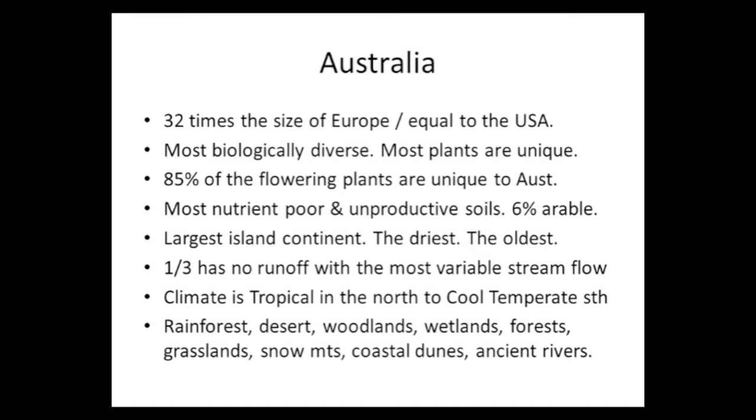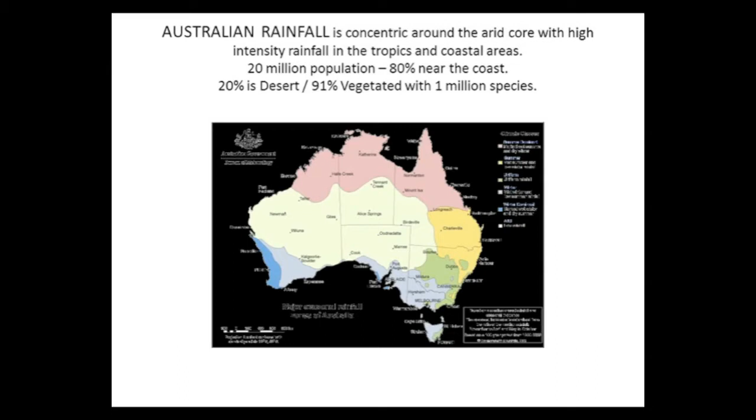As you can see from this map, our rainfall is concentric around an arid core with high intensity rainfall in the tropics to the north and the coastal areas, mainly on the east coast. 20% of the area is desert, which is that white patch, and 91% of the country is vegetated, mainly with hummock grasses and 1 million species, a lot of which have not been identified as yet. There's something like 75,000 flowering plants that aren't found anywhere else in the world.

The interesting thing about Australian plants, trees, is that the germination process for the seeds requires the chemicals from the bushfire smoke, which stays in the atmosphere and then mixed with water becomes part of the germination process.

This landscape will bounce back in about 3 months, and it's always interesting to go through the bush after a bushfire and to see how quickly the seeds start to germinate.

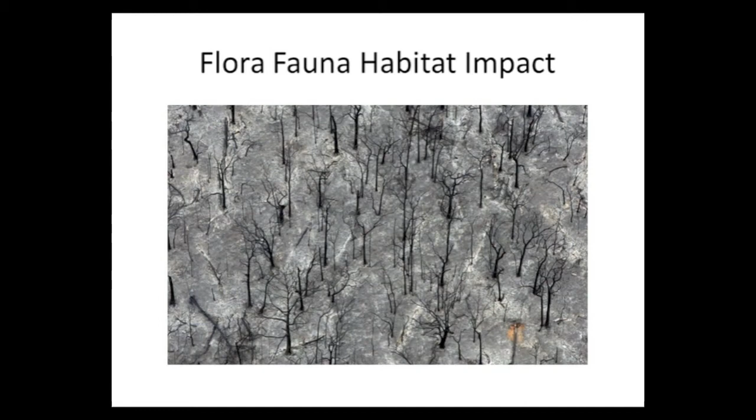In the far north, we've experienced a greater incidence of cyclone activity, which is wiping out the main agricultural belt supplier for Australia, sending food prices up. We envisage that over the next 100 years, Australia will be dependent on its food imports, as we see climate change and the agricultural belt having to move further south where the land is far more expensive and there's far more urbanization.

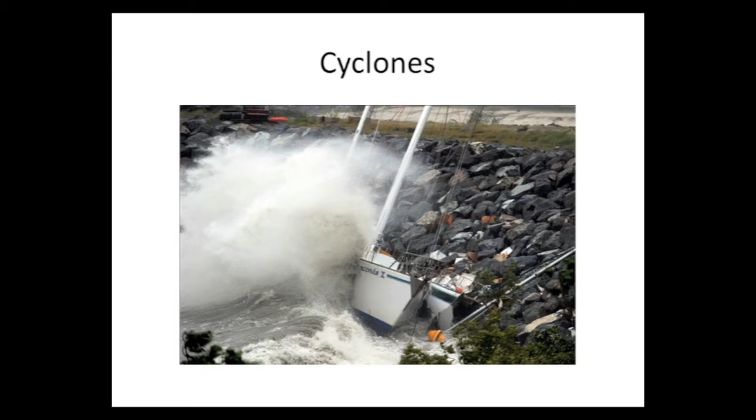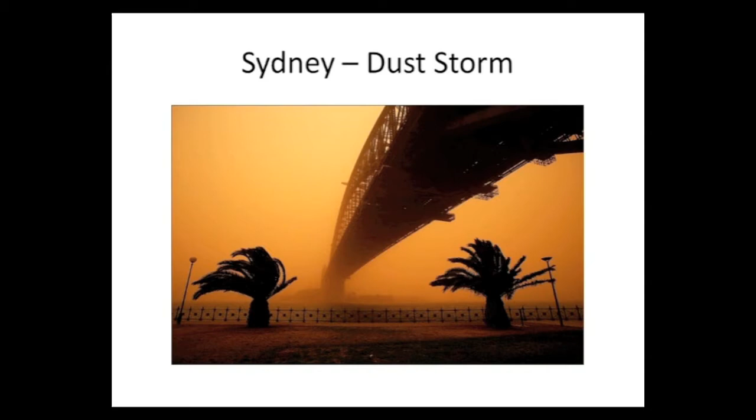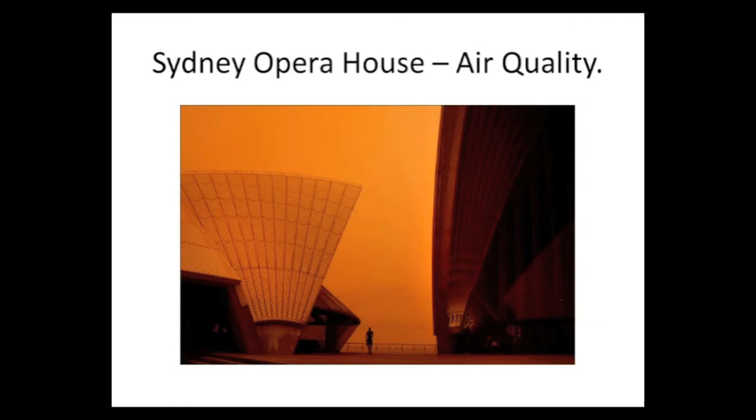Other strange phenomena have been caused by the 100-year drought. Red dust from the interior of the country has been blown and deposited in Sydney, 1,000 kilometres to the east on the coast. It's not like this all the time, but we're starting to see occurrences like this, which we're not used to.

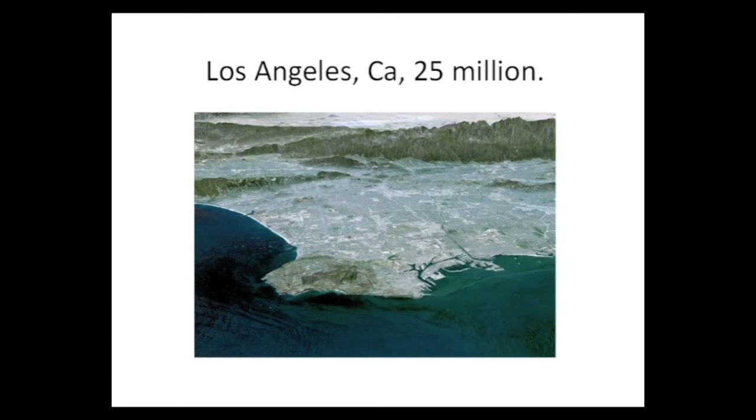Recently I flew over Los Angeles on my way to Mexico, and it was a bit of a crystal ball into how some Australian cities could be in another 25 years. We tend to have urban sprawl in Australia, with 85% of the population living in the capital cities, on the coast, or within 50 kilometres of the coast.

All of the stormwater runoff coming off the hard surfaces of cities is starting to impact on the quality of the waterways and the oceans around the cities.

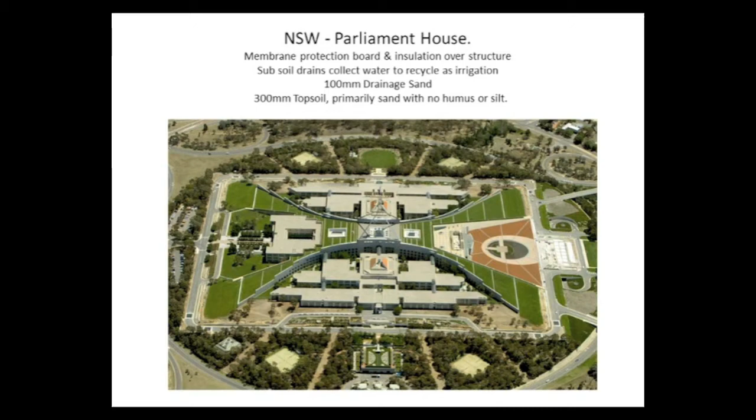It's interesting that recently they're trying to save 40% on the water cost for this green roof, so we've actually specified native grasses rather than Kentucky rye. Initially, the vision was that you could walk over the roof, but for security reasons, nobody's allowed on it anymore - not even kangaroos. There used to be herds of kangaroos walking across this roof, but that's all changed.

I'll just go through some of the cities, starting off with Sydney. City of Sydney are very proactive - they've got a 2030 vision for Sydney.

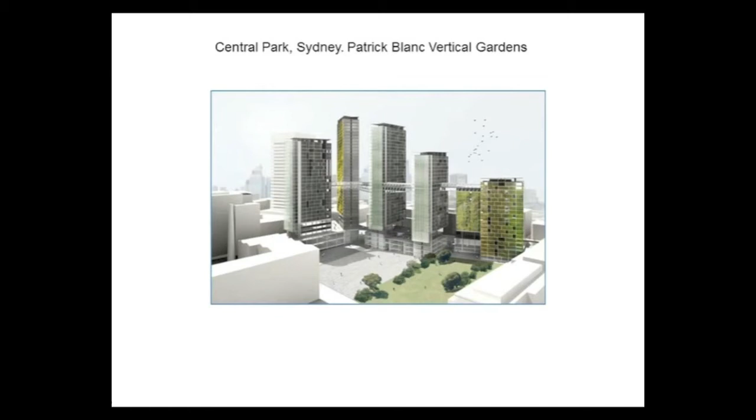This is one development in the CBD, apartment towers with Patrick Blanc coming over from Paris to design and install green walls on the facade. By the tallest wall, I mean a 33-metre high north-facing vegetated mat wall using irrigation and nutrient system with no soil.

There's 4,528 native Australian plants from 69 species, fed by a grey water dripper irrigation system running across at 3-metre intervals, and the irrigation system is automatically activated six times a day and can be remotely controlled.

There's also a 36,000 litre water tank enabling water to be cycled to reduce overall consumption. The plants were chosen for their hardiness, and some of them thrive in high exposure sun, such as the acacia and the poa, placed higher up on the wall.

This is a retrofit green roof amenity space quite close to the Trio Apartments in Camperdown. Quite simple Australian hardwood decking, minimal design, buffalo turf and a tuckeroo tree - a beautiful, simple design.

This is quite a beautiful civic precinct, where the old water aqueducts are, in a part of Sydney which is quite historic, with a lot of historical buildings and parks. The idea here was to integrate the old historic structures with a green roof, and it's actually a well-supported area.

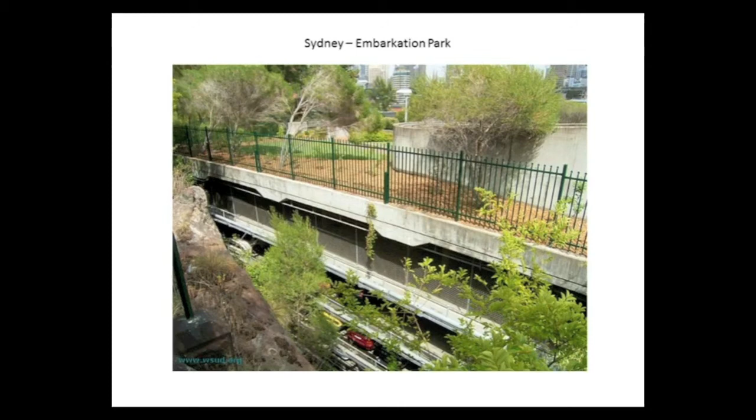This is the M Central apartment block, which has received a lot of media attention in Sydney. It's quite close to the CBD. The project drivers for this were visual amenity, increased usable open space, and to improve the market value.

The design was done by 360 degrees, and the green roof classification is intensive, but the depth is 300 generally, and localised for 1,000 millimetres, that's 1 metre, for trees. The plants are mainly just low water use species, including native grasses, shrubs and trees. Some of the mature trees that were imported into the rooftop are Cupaniopsis, Plumeria, and Dracaena draco.

It's basically a collaboration of decking pathways through expansive native grasslands, leading into recreational opportunities, secret lawns, soft play areas for children, and formal and informal gathering spaces with barbecue facilities, and sculptural arbour cloaked by flowering climbers. It's quite a beautiful and popular rooftop green space, and they did a survey—they found that 40% of inhabitants in the apartment block were actually using this on a regular basis.

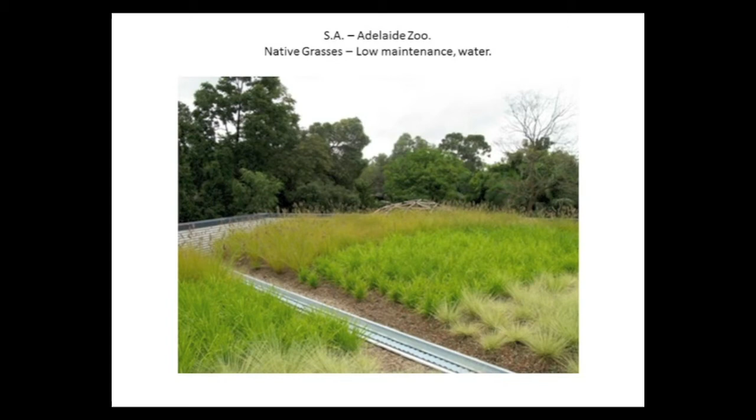The plantings, covering about 825 square metres, needed to function well in cold winters with frost and extreme heat in the summer, and needed relatively low maintenance. This redevelopment of Adelaide Zoo was finished in 2010, and the driver was integration with landscape and creating a ground-to-roof connection.

The plants on this fabulous entry green wall were grown with their individual mixed species modules, grown off-site, so that when the wall went in, it was 100% plant coverage, and the modules were delivered by truck and installed.

The pattern of the plants alludes to the proximity of the first creek. The plants used in this wall were Adelaide plain species, such as the saltbush, Dianella and Lomandra.

This is another angle of the zoo entrance and the green wall. There's a total of 160,000 litres of water stored below the forecourts, and this external living wall of approximately 90 square metres is located adjacent to the entrance precinct and links the ground plane to the roof above to maximise the potential habitat opportunities.

This is above the green wall which connects. This is the green roof, and when these native grasses do grow, there'll be a multitude of habitat opportunities for birds and insects, lizards, etc.

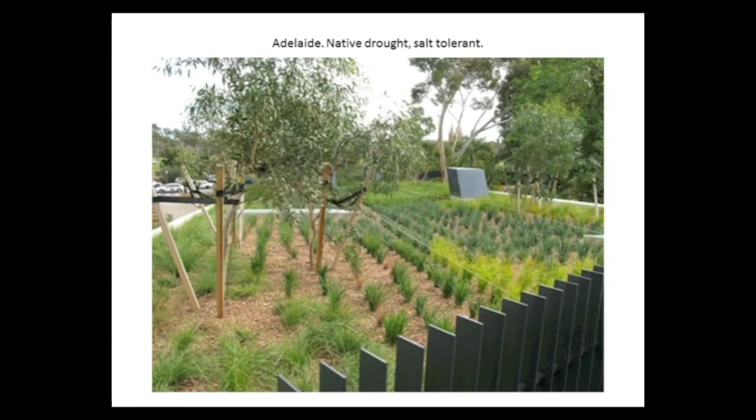Okay, I can't spend too much time. It's a big country, lots of projects. But moving east, we go to Victoria, and the capital of Victoria is Melbourne. Melbourne City Council are very progressive and doing a lot of exciting projects.

In 2008, they set up what's known as Canopy, which is a forum meeting once a month, and it's discussion-based. It's really modelled on the Sheffield Nigel Dunnett facility, where there's a collaboration between the University of Melbourne, City Council, professionals, developers, and basically anyone who wants to come along and discuss green roofs. It's been a great plus and seen a lot of projects.

I think this is an absolutely stunning example of integration between architecture and a sensitive landscape. The green roof is intensive at a depth of around 300 millimeters. The plants used were the indigenous coastal species, like large tussock grass and lomandra, spiny-headed mat-rush.

And it was a green roof that was the optimal solution to create a high-performance environmental building and to introduce a new building into a sensitive landscape and wetland environment in a way which contributes to the local ecology. I think it's just a beautiful solution.

The Venny in Melbourne City is a project you could go on for hours about because it's mainly done as a research facility, and this is really cutting edge. It's an extensive green roof, and the drivers for this were sustainability, human comfort, because it's a communal backyard play space for children between 5 and 12, and also a research trial for the public domain. The plants used were native and exotic species.

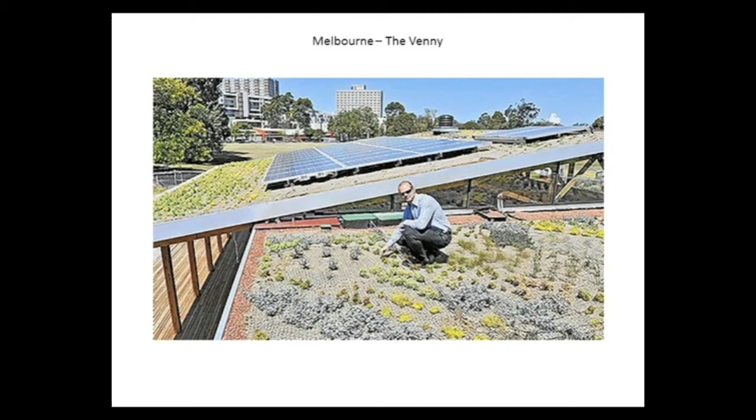The CH2 building is an office block, 10 stories, and it was commissioned by the City of Melbourne Council for 540 of the Melbourne City staff. Underneath there's car spaces and shops. It's situated right in the heart of Melbourne. The plants they used were native and exotic species, and it was Australia's first 6 Green Star design certified building.

The Green Star system in Australia is a little dubious. You can get a Green Star for putting in a bike rack. However, green roofs and green walls have to provide a habitat that didn't exist before.

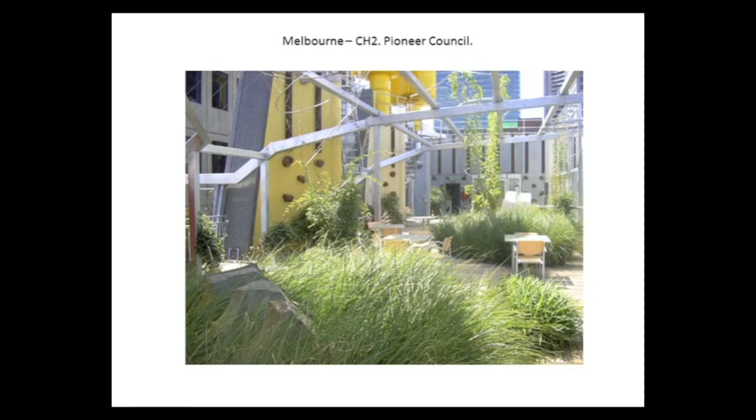This building also has climbing plants going up a trellis system, which I'll just show you in a second on the next slide here. As you can see, there's a stainless steel mesh trellis system on the verandas. Initially, the wisteria and the Rosa banksiae got a sort of mildew mold and were replaced with some Kennedia and Pandorea, and I think also some Trachelospermum, which seem to be doing quite well.

Now, this is a good example of a bit of Australian ingenuity. The aim here was to make Melbourne more sustainable. So the Growing Up project was started, and it was launched in March 2009, offering CBD building owners an opportunity to win a free green roof, designed and retrofitted particularly for their building.

So applicants put in their designs, and they were shortlisted. Architects and landscape designers were invited to see their design come to life and win $10,000 by submitting the most sustainable and innovative green roof. This is 131 Queen Street, which won the award, and it became the first green roof in the world to be fully funded by a competition. Well done, Melbourne.

Just a little green wall in Melbourne to break up a rather stark white atmosphere, add a little bit of psychological well-being for tired workers. It's been quite healthy, this green wall. It's been in for about 6 years now.

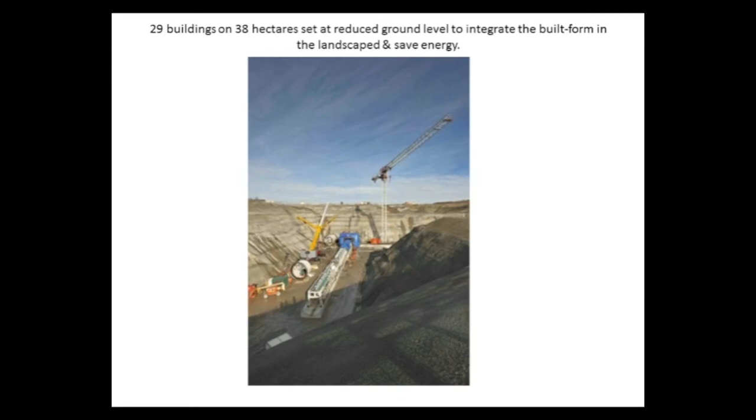Basically, the whole project was based on the concept of a green line running through the site, and a feature of it being the innovative living roof, which was and still is to become the biggest green roof in the southern hemisphere, being 40,000 square meters from memory.

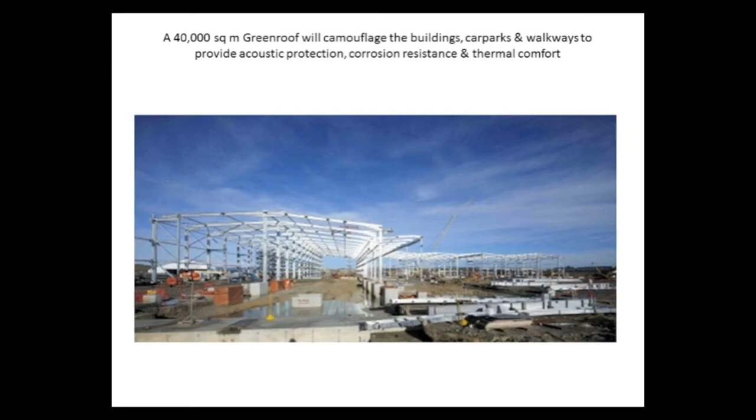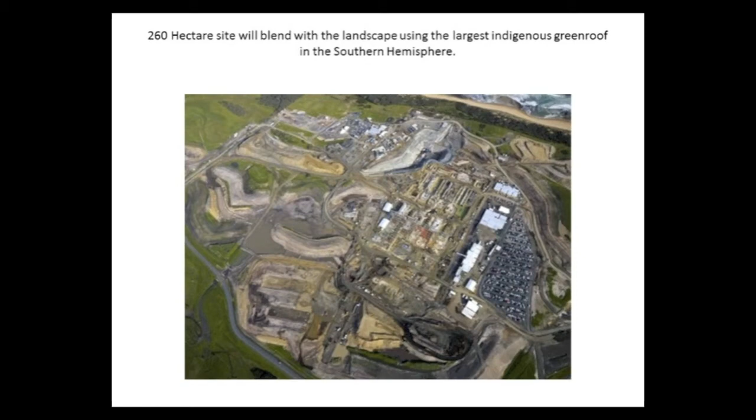Yeah, completely covered with living indigenous vegetation, of course, and that would also provide acoustic protection and help with corrosion resistance and thermal mass and insulation, thermal control, and also reduce the maintenance costs. We're yet to see it; it's well under construction, and I think it's practically finished. I know the green roof is finished, but I don't have any photos of it, unfortunately.

I know Australia and New Zealand are fiercely competitive, especially at rugby union. They have a lot in common. They were both settled by the British around 200 years ago, and we're still reasonably young societies. And Australia and New Zealand have the advantage of an extensive body of worldwide research and project precedents to draw upon, which for a new industry like the green roof industry is an advantage.

There's also the challenges of a relatively small population and economic base, in addition to specific climatic extremes that require some different approaches and solutions to those suitable for the Northern Hemisphere. And I think Australians and New Zealanders are quite renowned for their ingenuity. This is showing through with green roof and green wall design. Indeed, we need to look firstly within our own lands and histories to develop ideas and directions that have the most relevance for us.

Le Parc in Auckland, New Zealand, won an award from the Institute of Landscape Architects, and it's just one of those spaces that continues to delight people year-round. It's a place of serenity and relief from the hustle and bustle of everyday life. It's 3,500 square meters of private park, and it's an elevated landscape with a depth of between 100 and 400 millimeters.

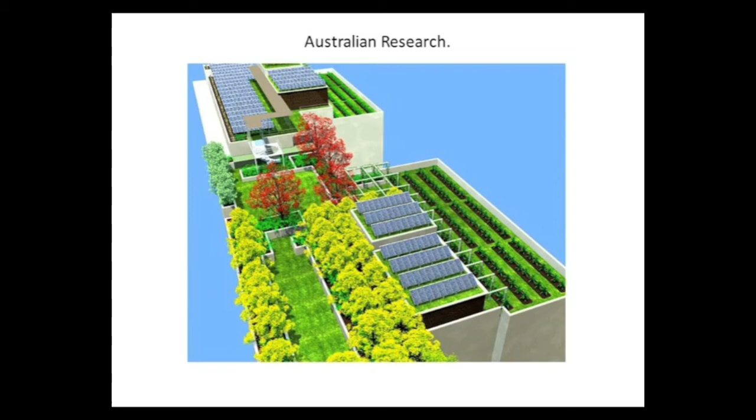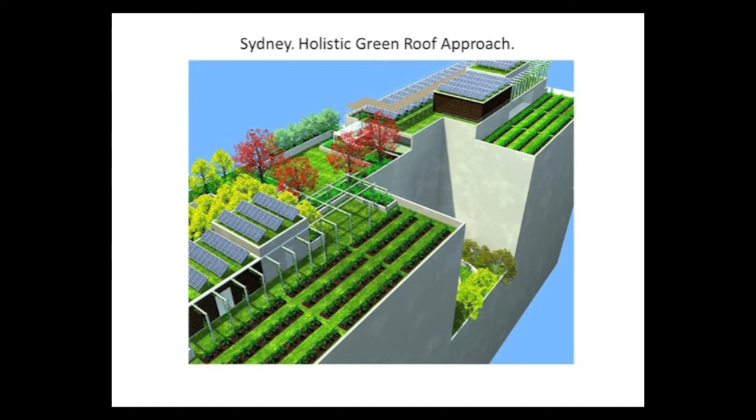photovoltaic cells to do a bit of a test on evapotranspiration cooling for photovoltaics, and incorporated market gardening with a lower level on level 3 for a childcare facility due to security and childcare centre. Also fruit trees, citrus, and amenity space for any functions that people in the building have. It was still on the drawing boards, but hey, we've got hope.

Back to Melbourne research, and the project driver on this one was sustainability, visual amenity, human comfort, and indeed ongoing research opportunities. Within the building's innovative and integrated energy saving features, of particular interest are the green roofs and the roles they play in a holistic approach to sustainability.

A significant design concept was to compensate for the vegetation that would have naturally existed on the site, which is achieved with horizontal and vertical plantings, the roof landscape and the northern green facade of the building. In addition, there's internal plantings in the office areas and on the summer and winter terraces at the western end.

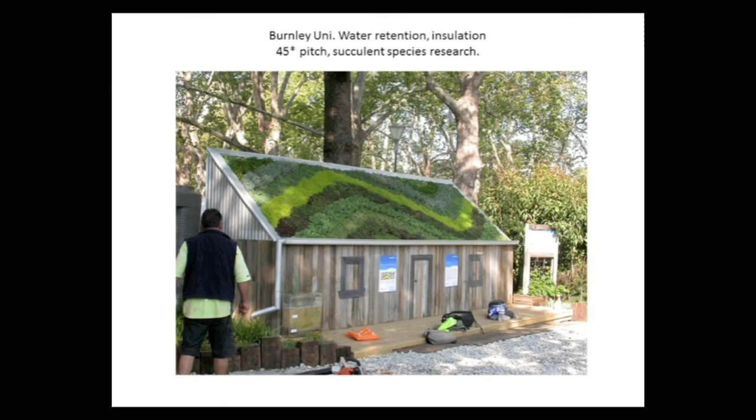This is the Burnley campus, Melbourne University, and it's, I think, a really cute little project. Water retention, succulents, on a 45-degree pitch roof. No easy task, but very successful. Of course, researchers have got an eye on this as a new industry for nurseries and supplying plants also to overseas, and because of the resilience of Australian plants, there's a lot of research into their drought tolerance, actually, and also salt tolerance.

Probably not up to scratch with Hydrotech in America, but we're also doing research into modular and especially shallow growing media profiles, between 50 and 80 millimeters. Due to the increasing blight of bushfires, there is also a place for green roofs to more or less protect the buildings as bushfires move through communities, and the soil profile being watered down would act as a wet blanket over the building and protect it.

I've had a few arguments with researchers on carbon sequestration, saying that green roofs can store carbon much similar to how timber structures store carbon, and should be included as some sort of carbon subsidy. This particular project by Stratum was comparing carbon sequestration and energy saving benefits of Australian street trees for local councils. And there's two projects, the second one directly to quantify the benefits of trees upon energy use for buildings, air conditioning and their water use. This has also been done at Melbourne University.

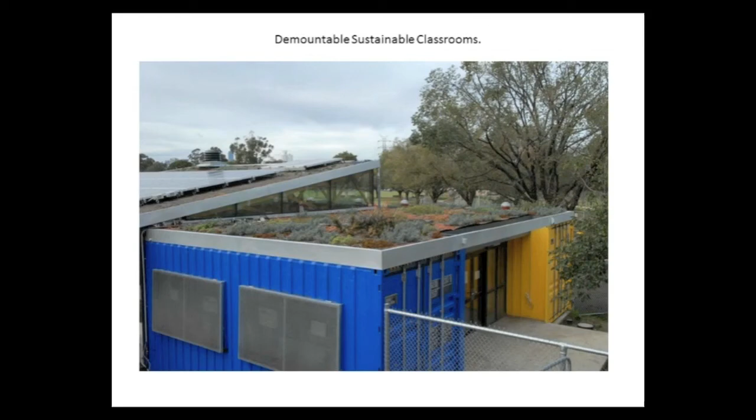As if I haven't said it enough, the drought tolerance of plants in Australia, another example of using it on a crushed tile. These plants require hardly any water at all. This research project is mainly for demountable classrooms for schools and also for Aboriginal housing, using just a brown roof, crushed rubble and whatever plants grow due to bird droppings, etc. So be it. Just moving on to Australian vegetation.

Initially we relied on plant documentation from Europe, North America and Asia, as there was little knowledge about specifying green roof plants in Australia and New Zealand. But we know now that rooftops are generally exposed to climatic extremes and may experience direct and reflected sun in summer, heavy rain or snow in winter and turbulent winds all year round. So the plants need to be selected so they match the relatively harsh environment conditions of the built environment.

This has led us into researching particular plants, because there is no one plant to specify for Australian rooftops due to the variation in climate. Another driving influence in Australia is, because it's a young industry, the cost of green roofs is still quite high, averaging for an extensive around $500 and for a green wall around $2,500 a square metre. So it's not surprising that in Australia we're moving towards a shallow substrate and using indigenous plants that have a shallow root system and require little maintenance.

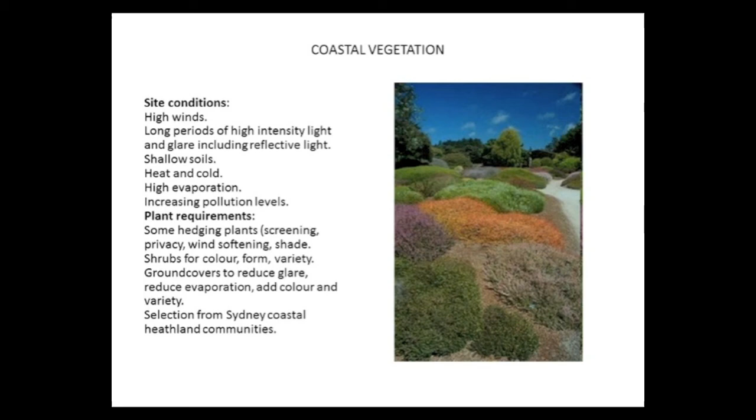In Australia, I think we're still fighting the client when it comes to specifying plants, who want lush, beautiful, green, vegetated roof gardens, and we've always pushed for the green roofs to be low maintenance, using hardly any water and not requiring irrigation, not much nutrient and also little maintenance. So we're choosing plant communities that actually work together rather than just a monoculture or a selection of equatorial species.

Some of those species for an extensive green roof would be, I'll just give you the common name because it's simpler, some of the grasses and tussocks: blue tussock grass, kangaroo grass, Australian salt grass, hairy spinifex. Some of the succulent ground creepers that are popular are the karkalla, the bower spinach, the ruby saltbush. Some of the ground creepers: small fanflower, the dune fanflower, the creeping boobialla, and some of the climbers that have done really well are the coast twin leaf and the nitre bush.

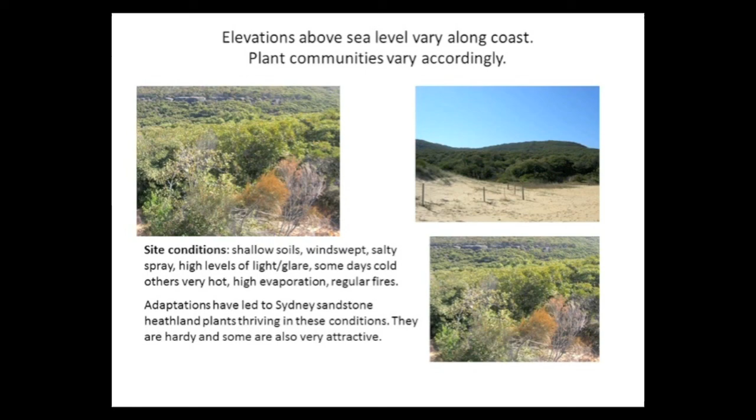There's high evaporation, and so we find specifying plant communities from the Hawkesbury region, which is a little bit further north of Sydney. It actually has more species than the United Kingdom put together. It's a couple of 100 square kilometres. So yeah, we're learning our lessons from our immediate environment and being very plant specific and site specific. For a high-rise green roof around 30 stories, we find the low, hardy, shallow root system ground covers that we find in the surrounding coastal regions and Hawkesbury regions to be ideal for that situation.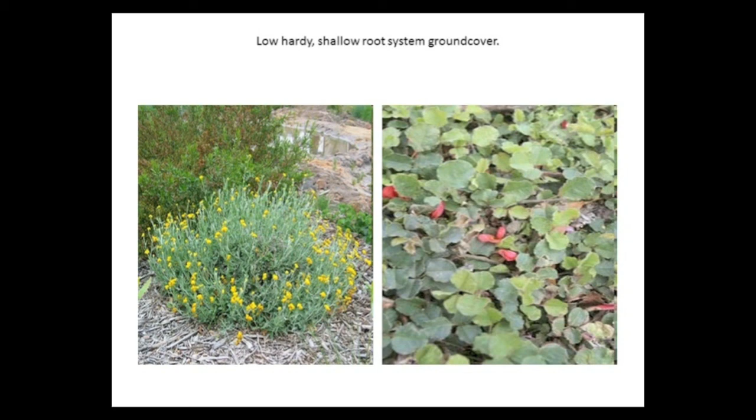So look, that brings me to the end. I've tried to incorporate pretty much all of Australia, show you some projects that we're proud of, some research, give you a bit of an insight into what's driving the green roof industry in Australia, even though it is quite young. And you know, I appreciate you listening.